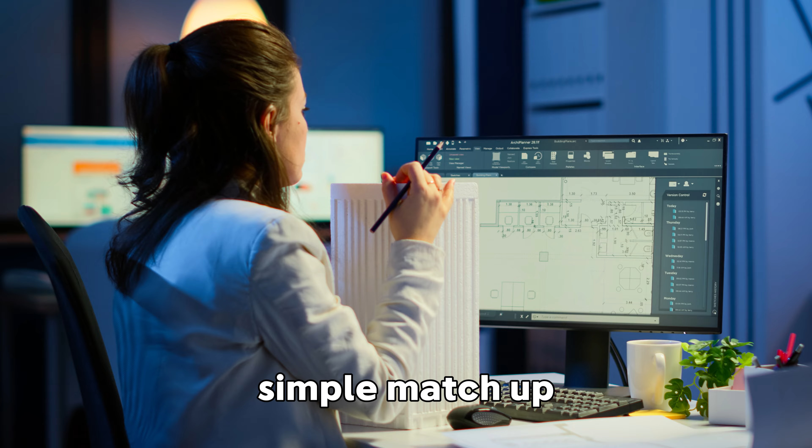SolidWorks versus FreeCAD, which is better? On paper, this looks like a simple matchup, paid versus free. In real life, that's not the decision that matters. The real tension is what happens after the first model, when you revise, collaborate, and try to turn a design into something that other people can actually use.

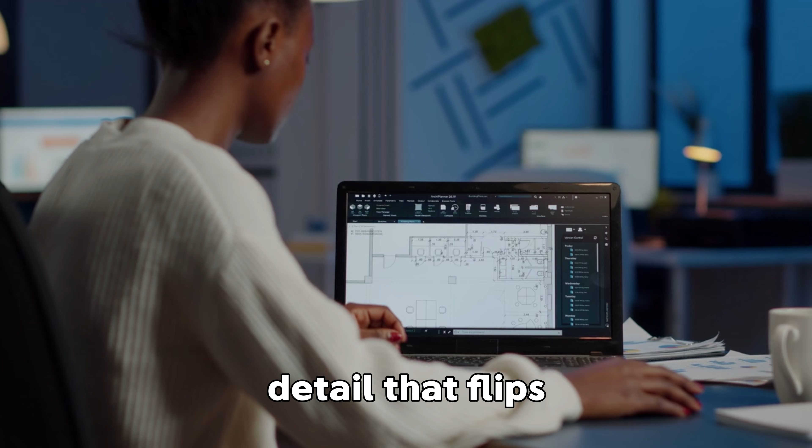There's one deciding detail that flips the better answer for most people. I'll hold it until the end because it's the fastest way to avoid the wrong frustration. Let's keep it practical and grounded in real workflows.

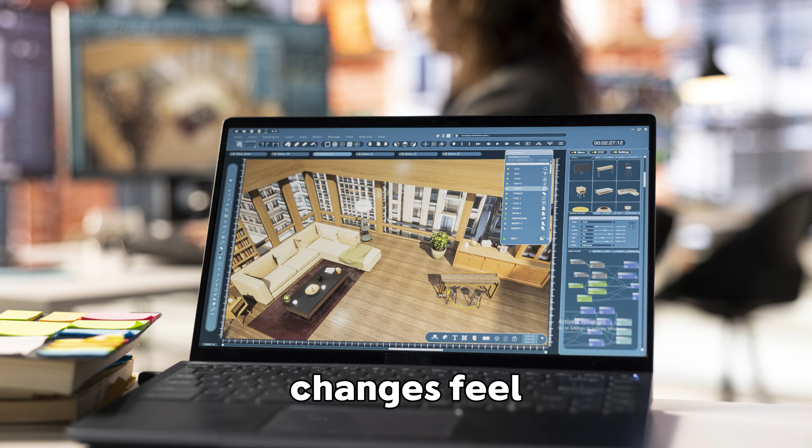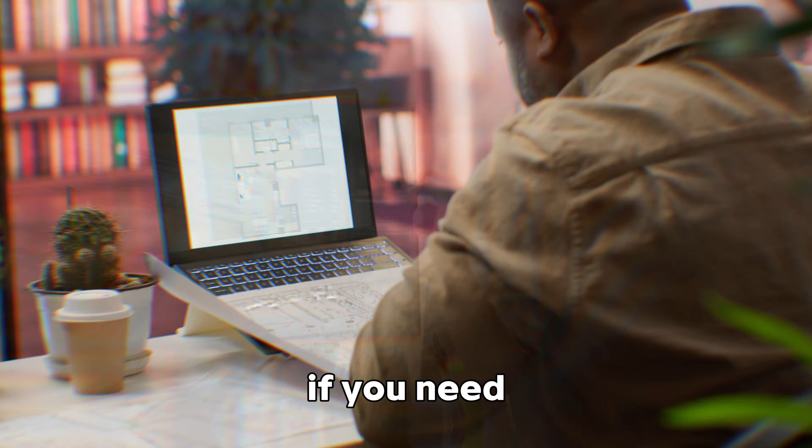How I'm comparing them? I'm comparing everyday mechanical design, parts, assemblies, drawings, and how painful changes feel. I'm also looking at stability and predictability, not perfect, just whether you can trust the tool to behave the same way tomorrow. And I'm weighing collaboration. If you need to share files, work with a team, or align to standards, that changes the value of everything. The goal is choosing the tool that fits your reality, not your budget story.

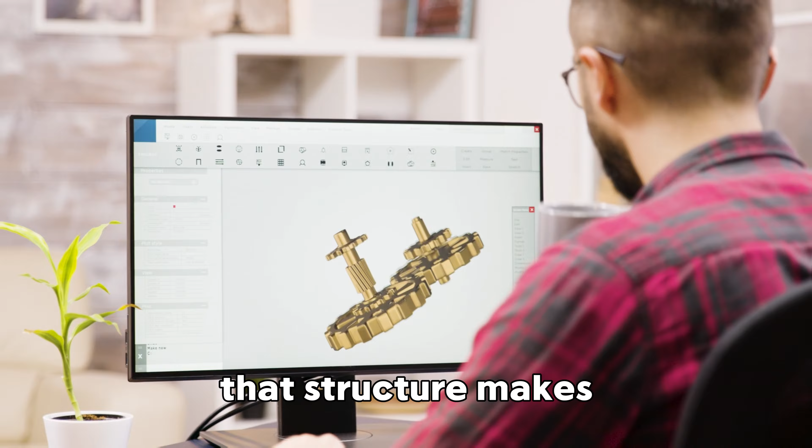Where SolidWorks usually wins. SolidWorks is designed for parametric mechanical engineering. You build parts as feature histories, assemble them with mates, and generate drawings that follow the model. That structure makes revisions feel controlled. Change a dimension, rebuild the model, and related features and drawings can update in a consistent way. SolidWorks also tends to fit well in professional environments where file handoff, repeatable practices, and team expectations matter.

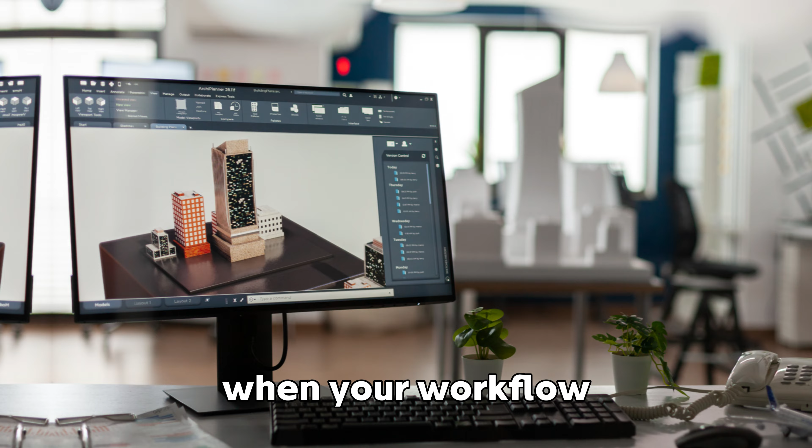The honest trade-off is commitment. It's a serious tool with a serious learning curve, and it's easiest when your workflow is disciplined. SolidWorks usually wins when you need reliable production intent.

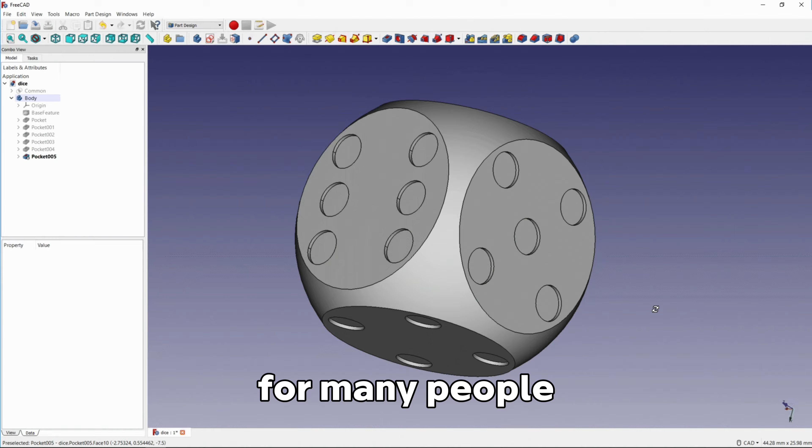Where FreeCAD usually wins. FreeCAD is a powerful option if you want flexibility and access without licensing barriers. It's especially appealing if you like open workflows, community-driven development, and the ability to customize how you work. For many people, FreeCAD becomes a solid choice for learning parametric thinking, building personal projects, or working in environments where you can't justify a commercial tool.

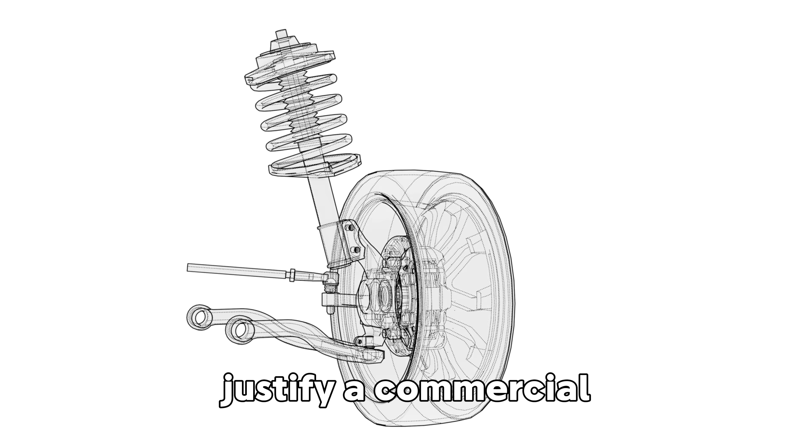The honest trade-off is that your experience can be more variable. Depending on what you're doing, some features may feel less polished and workflows can be less consistent than a tool designed for large teams. FreeCAD usually wins when you need capability without lock-in.

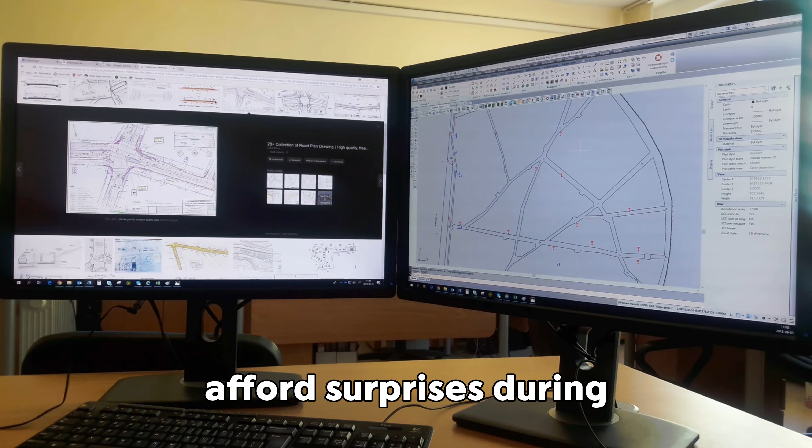The deciding detail most people miss. Here's the detail that flips the answer. Do you need guaranteed workflow consistency, or do you need maximum freedom? If you're designing parts for manufacturing, collaborating with others, and you can't afford surprises during revisions, SolidWorks often fits better because the ecosystem is built around predictability.

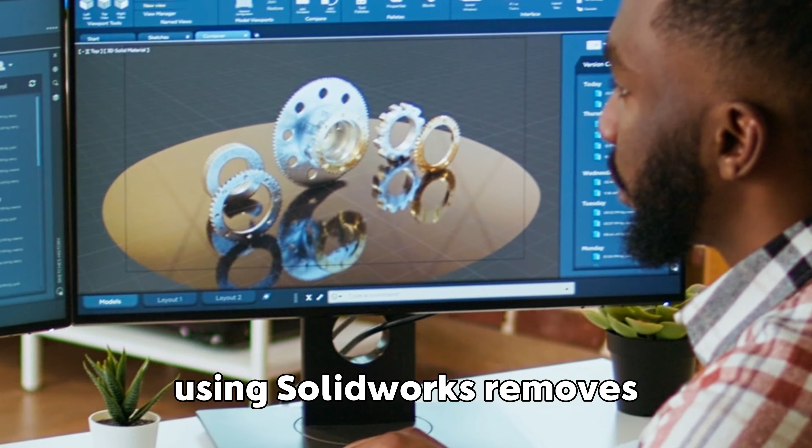If you're working solo, learning, prototyping, or you need a tool you can use without licensing constraints, FreeCAD often fits better because it keeps you moving without external limits. Now add the practical layer, file handoff. If people around you expect SolidWorks files and conventions, using SolidWorks removes friction. If your world is neutral formats and personal workflows, FreeCAD can be enough.

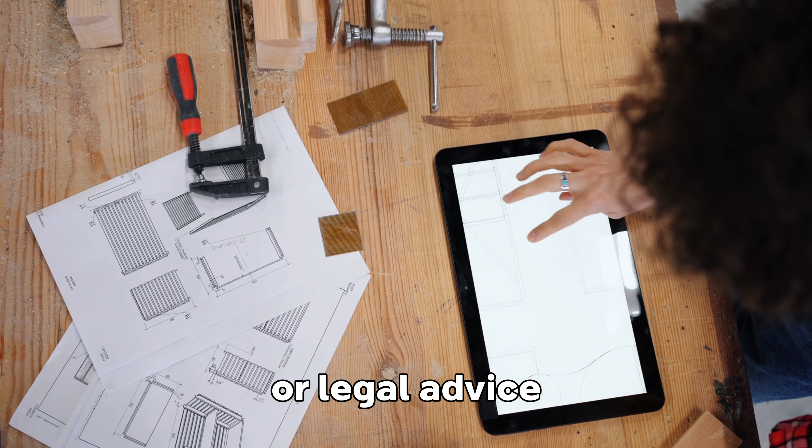This is general info, not financial or legal advice. If you are choosing software for paid deliverables or compliance-driven work, it's smart to align with project requirements and stakeholder expectations. So which one is better for you?

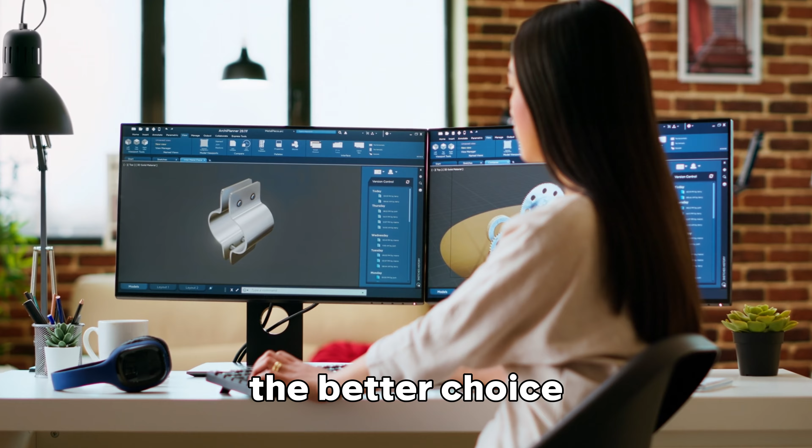If your priority is professional-grade predictability for parts, assemblies, and drawings, SolidWorks is often the better choice. If your priority is flexibility, learning, and avoiding licensing barriers while still doing serious CAD work, FreeCAD is often the better choice. And the loop resolves here. The better tool isn't paid or free. It's whether you need workflow guarantees or workflow freedom.